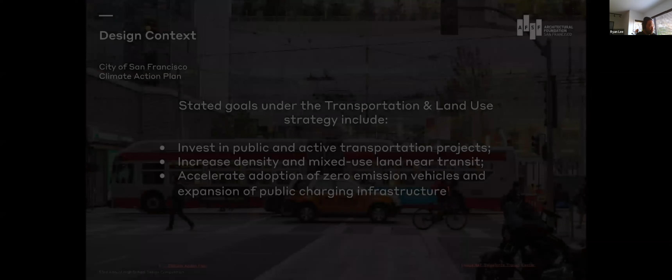So a little quick design context going into this year's competition brief. This was all framed around the overall basis of Mayor London Breed announcing her 2021 climate action plan, which highlighted six key sectors. The area of focus specifically for this year's competition was number three, transportation and land use, although a lot of those six opportunities kind of weave together.

This was situated around the idea of investing in public and active transportation projects, looking at density and really what a transit-oriented development is, in terms of increasing density and increasing access and usability for a particular neighborhood that could then expand for equitable access elsewhere via the transportation hub in this case.

Knowing that Salesforce Transit Center in downtown San Francisco exists as a major hub, part of that is getting down there through this downtown rail extension, which will extend the future lines of Caltrain, which currently terminate at 4th and King Street in the city, but also potentially open up the opportunity for the future of high-speed California rail service to terminate there.

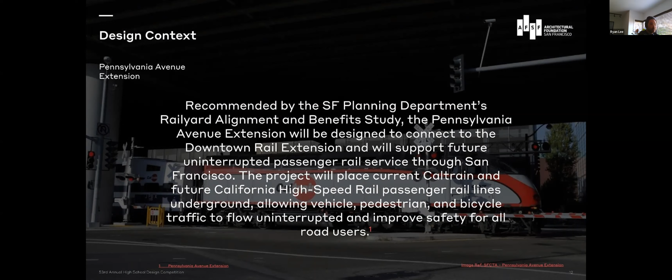So with all of that in mind, SF Planning has gone through a very rigorous process up until this point in planning what this downtown rail extension will be, how it will weave through the city, and looking at potential opportunities for railway stations along the way and increased transit hubs dotted along that route. A lot of that, as it relates to the Pennsylvania Avenue extension project, is really to talk about this intersection between Mission Bay, Potrero Hill, Soma, and Dogpatch, all within the area of the site that all of the students explored this year.

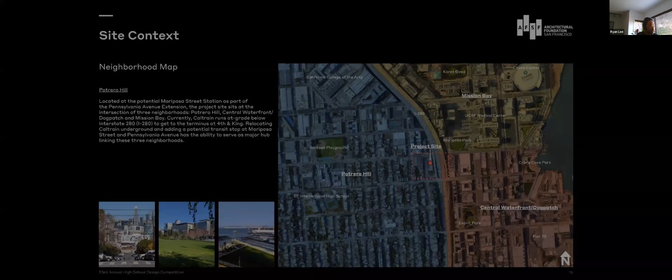So here's that route, running along the eastern edge of the city as it makes its way downtown towards Salesforce. Along that route is the potential proposed Mariposa Street Transit Hub station. You can see the project site here, situated between the nexus of Potrero Hill, the Central Waterfront Dogpatch, and Mission Bay. Zooming in a little closer to the site, this infill project just alongside 280 runs pretty linear with a sloping hill that runs high to low from Mariposa, then down south towards Pennsylvania Avenue.

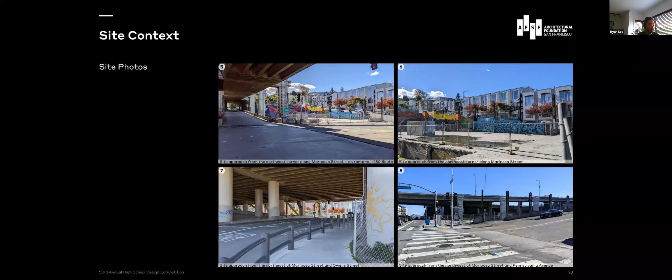A few site photos of what it looks like today. I know a lot of the students made their way out here, did a little site visit to soak in the site for themselves and really draw inspiration from being there in person, getting an idea of the neighborhood context and palette, especially for those of you designing this from afar.

All of the program elements the students worked on revolved around some major areas. The first being a transit-focused grand hall, including the main entrance and lobby, ticketing, and waiting halls. A commercial program brought in retail space along with a micro-mobility repair shop and a restaurant and cafe F&B opportunity. There was also the idea of embedding the transit hub with community-based social amenities, such as a senior center and an outpatient medical clinic, plus exterior space considering how a public plaza could be utilized on site.

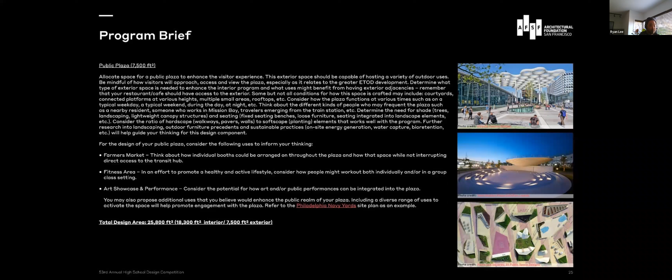It was a massive program brief for all of you to take in, digest, and interpret in your own ways. We commend all of you for being able to soak in all of this information and really put thought to paper, coming up with some really creative ideas for this.

All of you were very much considering your big ideas, looking at how to draw inspiration from either sustainability or diversity on site. All of these things we definitely saw come through in your work.

This year we had a total of 142 participants across 77 total entries, 29 of which fell into the individual category, 38 for group, and 10 for design process. Of those entries, we had submissions from 4 countries: China, Taiwan, South Korea, and the United States. We also had 5 total states participate: California, Florida, New York, Ohio, and Texas.

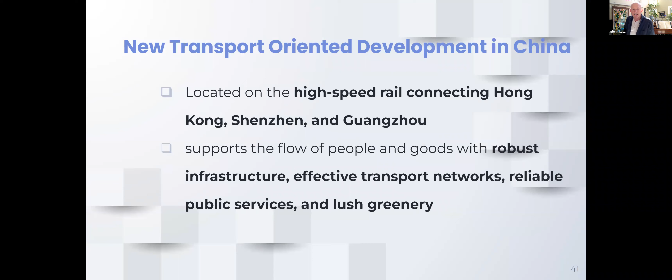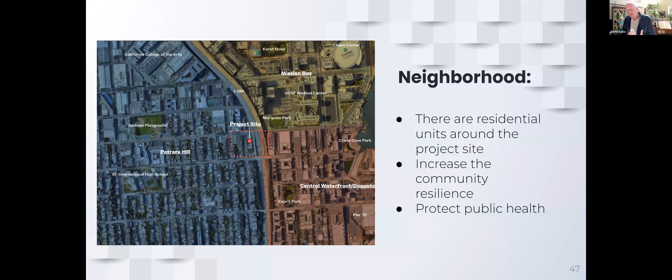Qingling really pulled on several very successful examples and looked at them in a detailed way. There was Denver Union Station, as well as one of the stations in China, where we looked at not only why the example was chosen as one we could learn from, but also pulled forward into a detailed analysis and lessons learned. So it's a respect for the history and the lessons that can be carried forward as we then try to apply it to this specific and unique context here in San Francisco.

It's just a really great example of a type of process that would benefit almost any project. That's really what we're rewarding here—that kind of looking back and learning what we can from the many things that have been tried in the past, and then taking the best lessons forward. Thanks, Glenn.

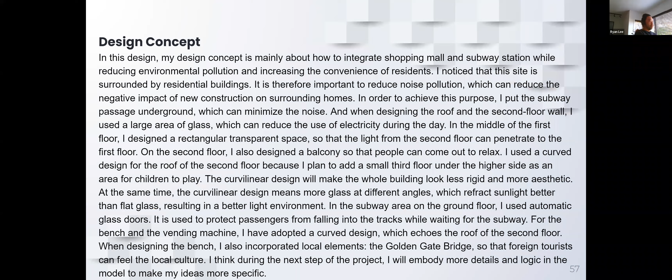There's a lot going on here in this deck, and I think a lot of this was also about describing some of the design through precedent imagery, helping articulate the intent of the space using precedent imagery in terms of what's been done as a reference. We do this all the time in a lot of our early inspiration work, and this is just part of that process that we don't see presented in this form as much as we'd like, because I know all of you are thinking of it from similar perspectives.

Congratulations there. We're going to go right into our third place entry for this. Third place for design process entry goes to Olivia Edwards for her project Under My Wing from Lowell High School. Congratulations to Olivia.

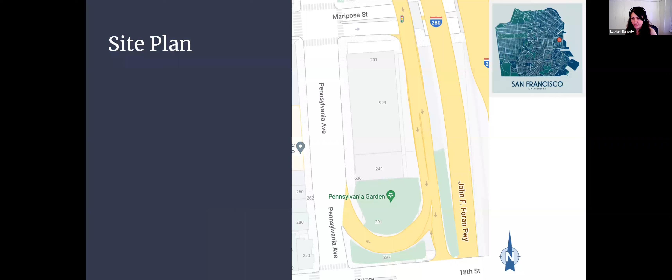What we really liked about your PDF slides is that you presented a lot of sketches of your design process. You gave qualitative descriptions of your reference of the moth, and also had a lot of site observations. You included all of your site notes. You discussed the freeway height and the relationship and priorities of circulation access points to the site, like what would be ideal locations for stairs.

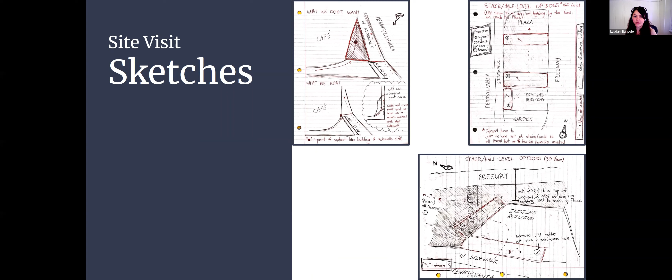We really appreciated that you thought a little outside the box about your modeling material, using clay because you felt that Revit could not express what you wanted as well. I think the design profession comes across this a lot, with new technologies brought from other industries to describe projects all the time. So congratulations to Olivia.

Olivia, are you here with us? Let's see her on the call. It's okay. Well, congratulations, Olivia, and thank you for your participation.

Second place for design process entry goes to Lesley Anne Chua for her project Metro Map Hub, Lowell High School. Lesley, are you here? You're not seeing her on the list. Well, but let's go ahead and talk about what we liked about the project.

Metro Map Hub was actually a lot of fun for us to follow through as jurors in terms of trying to understand the process, because it's incredibly well laid out. There's a very clear path from thinking at the highest level about the site and this inspiration, which is really these metro maps, these interconnected nodes and the colors that tie them all together.

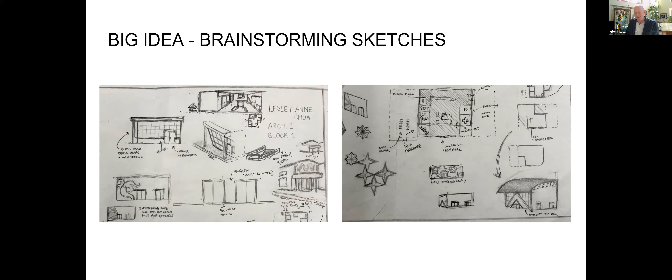And you can sort of see that process following through the initial brainstorming sketches, then she'll move forward into a little bit of an analysis matrix. And finally, we get to these preliminary diagrams, and really these diagrammatic sketches are ones that we really kind of enjoyed.

So it's ones where we're looking at these floor plan views, but seeing them overlaid with this almost looks like the metro lines, marking out the circulation paths and just the flow of activities kind of through the different spaces. So just be independent of the actual design itself, just understanding the thinking process, making that really clear.

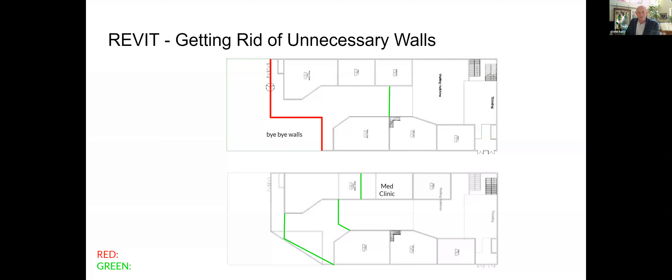So that we can appreciate it is something we always love as people who are consuming your designs, because the finished artifacts are great, but really knowing what's going through your minds makes it really special. It helps us to really appreciate where you ended up so much more.

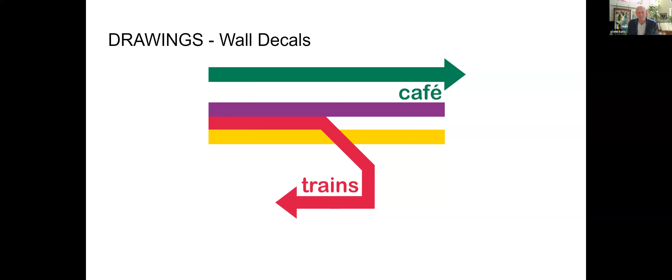So this consideration of really what could be modeled well and what, when we needed to, just could revert back to hand drawing, which is perfectly okay. Sometimes that's the best way to express your idea. And it's really just all about expressing it.

And then even as that final image of really how that whole thing that motivated us with these connections between the spaces, how that could turn into super graphics that could actually end up as decals on the walls of the station. Just really, it was a very complete package that really helped us understand the thinking and how that thinking actually ultimately worked its way into the finished product.

So yeah, it was just really great from that standpoint. Everyone can learn from just how to present that process and how helpful that is to the people that are trying to understand not only where you ended up, but how you got there.

Awesome. Thanks, Glenn.

Our next award, first place in this category, design process, goes to number 56, Brody Andrews, Leah Markle, and Travis G for their project Metamorphosis, also of Lowell High School. So yes, a huge congratulations to Brody, Leah, and Travis.

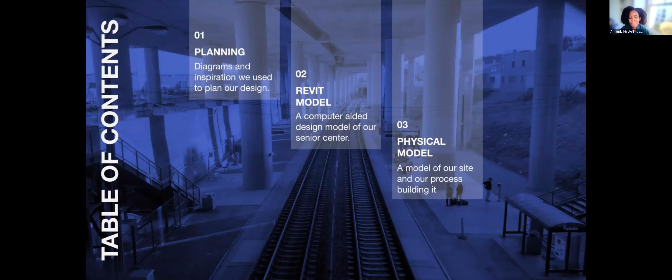I did see Travis's name in the participants, so maybe after I say a few words, I would love to hear, we would all love to hear from your team.

I think what we loved about this project is this concept, you see it in the first sentence, about life cycle. And this notion of life cycle and metamorphosis not only is related to the butterfly as they described it, but is also a concept in environmental design and related to architecture and how a building works.

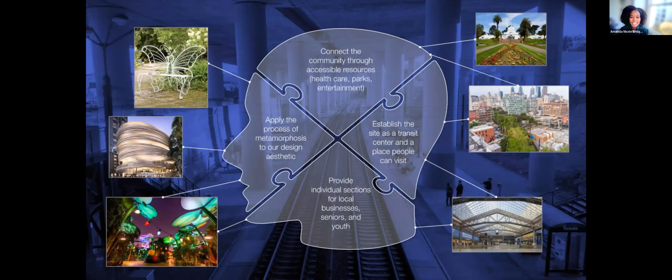As you can see, as Ryan is going through the slides, this is a very clear presentation. Not only is the design arc and the big idea very clear, but it's got great graphics. We thought that the hand sketches were really fantastic. And that just the conceptual study and analysis throughout this project created some really awesome results.

I mean, I think that kind of swooping forms we all really were drawn to. I think that images of the process, images of your model, which we'll see in a little bit, were really fantastic.

I think that some descriptions that you see in these renderings here, where, the rendering, maybe as it's developed, it will have more people or furniture or something, but even just one sentence about what the intentionality is behind it is really helpful for us, I think, as judges.

And here, these process images from the model, I just think are awesome. It gives us a kind of tangible, textured element, and really represents the overall scheme really well. So again, the big idea passing through the whole presentation is what we loved.

And we would love to hear from your team if anyone is on and able to unmute themselves.

Yeah, hi, this is Travis here. This is kind of crazy because this is my last competition I'll be participating in with AFSF, like my 5th competition I think. So this project was really able to show the transformation of how I've shown my process of working and stuff like that. I combined a lot of experience I've had from previous competitions all into this design. And it was really fun being able to work with everyone. We're all seniors, so yeah, we're just really glad that we were able to participate in these competitions.

Yeah, I agree. This is a really great way to end off the year and end off the architecture experience, especially with two people that I've kind of grown a lot closer with over time.

Wonderful. Well, thank you so much for chiming in. Congratulations again, and I hope everyone now gets to see your project and is enjoying it as much as we did. So thank you, and congratulations on finishing up your year.

Seniors, congratulations, you guys. Thank you. Really a lot of great clarity in the project and a lot of really great studies into exploration - we could really tell what you guys are interested in, and all of that really came through fantastically. So congratulations. One fantastic outcome is that it's successful because the judges all wanted to see where you were going to go next with it. And when you leave us wanting more, that is always a really good sign. So it really was a fantastic concept, and we'd love to see what you do next with it, because it seemed really interesting.

Now we're going to move on to the awards for our group entry category. I believe we have 3 honorable mentions to give away here. The first one goes to group number 14, Nander, Tanner, and Liam from Westlake High School, for their project Comfort, Efficiency, and Attractiveness.

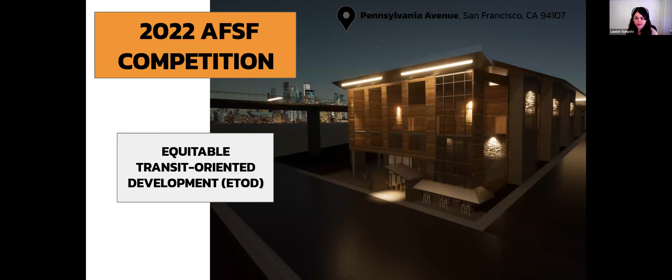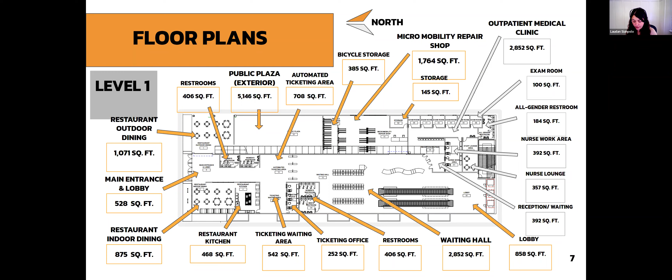Congratulations on your honorable mention for the group project. We really recognize that you took the prompt, you paid a lot of attention to detail, you laid out your spaces in very well thought through ways, and you have a clear understanding of scale. The building, both in plan and elevation, went hand in hand with the amount of space that you had, and you were thinking about circulation and flow. We appreciated all of your elevations in which you added shading, which gave depth so we could really understand what was in the foreground and what was receding from view. So we really applaud you on your thoroughness and clean presentation. It's really a great group of work. So congratulations.

Nander, I see your name. Are you and any of your other teammates here? And would you like to say a few words about the process and what you thought about it all?

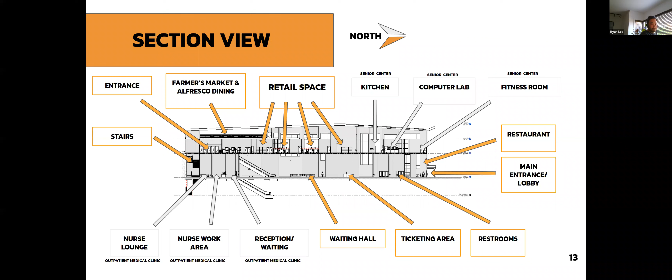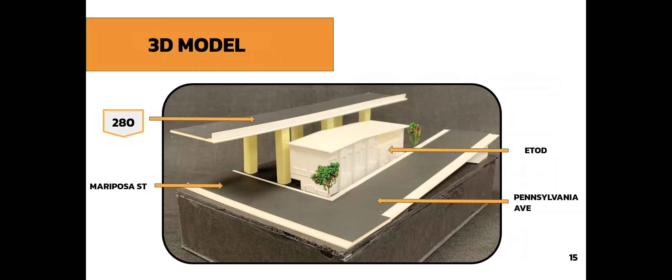Yeah, so in our main goal, there's so much stuff that we had to consider on this. I don't know where to start, but we basically wanted our project to look good but also function well. So we tried to make the roof slightly angled, so the long side would be full of solar panels that face the south. And we also wanted to consider the railways that go below, so we included a lot of escalators, systems, and all that stuff. So yeah.

And I'm very happy to be part of this competition.

Thanks, well, great job to your whole team. Thank you. Congratulations.

Next up, honorable mention in the group category goes to the Tri-Center by Alvina, Joanna, and Ryan of Burlingame High School. Are any of the three of you here with us today?

Hi, yeah, I'm here. Hi, Joanna. How's it going? Congratulations. Thank you.

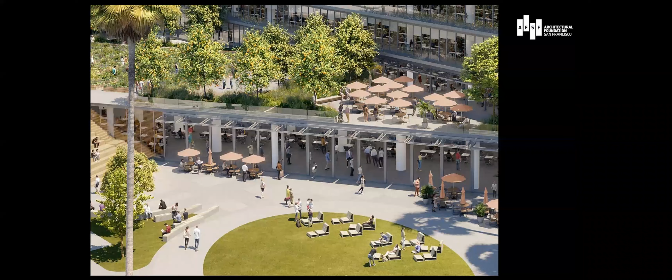Anything you'd like to talk about in terms of this project and what your big idea was and what you guys were aiming for here? Yeah, so we wanted to create a more, if you look more into the slides, these are more inspiration slides. We wanted to do three different separate parts of the site and connect it together through small spaces and big spaces. So in our later slides, we tried to have this theme go throughout the whole building, and our facades also. We tried to have these curved features throughout the whole entire site to make it more connected.

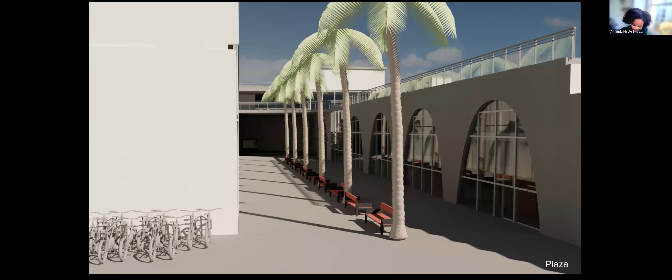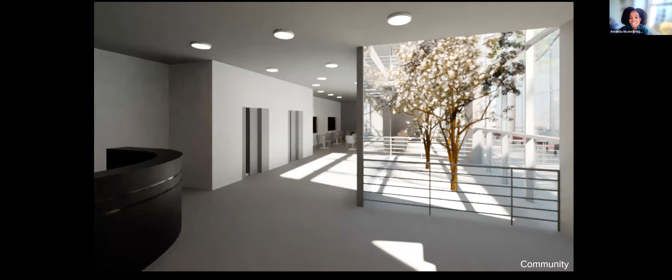That's great. I think what we were really drawn to in the project is exactly what you're talking about, this notion of breaking this really large mass into smaller pieces and creating these activated, awesome public opportunities for cohesion through, around, under, and above these smaller volumes. I think that's just a really great and sophisticated step to take for this project, and all the judges were really inspired by that aspect. I think there's a landscape story, there are trees, really beautiful renderings here. We can see those, and I think that intricacy, you're really focusing on the journey of people and individuals as well as the community through the buildings and spaces.

So we really were taken and struck by those aspects, and the outdoor amphitheater especially, we talked about several times. We thought that was a wonderful way to face out towards the community while also drawing people into the project and into the building as well. So that's what we're really excited about, and congratulations again on the honorable mention. Thank you. You're welcome.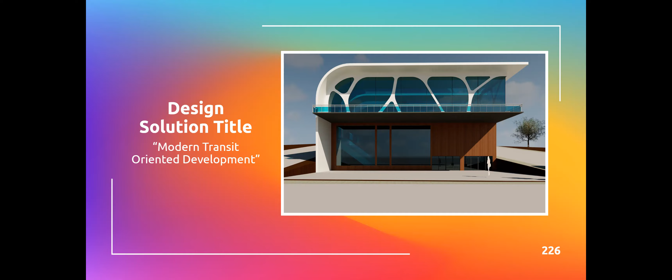Yeah, we just had a great time doing this project. It's our last project together, and we just wanted to go all out. We got some reference from the Leonardo cube, and we used that as the top of our glass for the second floor. And then we wanted to go for a more modern effect with wood paneling on the sides.

Awesome. Also, this is Isis, I wanted to add to it. One of the things that was very impressive to us, and the entire team agreed upon, is that the modernist feel and the sustainability aspect of your project, starting with the solar panels and the types of window panels that you incorporated into your design, and the roof garden as well, and the connection with the corner of Mariposa and Pennsylvania Street.

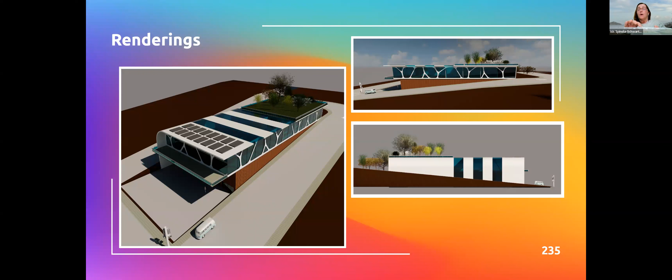And one other item that I wanted to mention is, what was the inspiration for the curtain wall, the glass on the second floor? Because it has a very modernist, organic feel to it. And I think, Ryan, if you keep going, we'll have an elevation of that as well. What it looked to us as something that is very 60s, very modernist, early modernist, but it also has a very 21st century approach to it. And all of that, it was very intriguing to us, so what was the inspiration there?

We used the inspiration of the Leonardo cube. We had seen some references, and all three of us were drawn to it, and we thought it'd be such a great way to bring in natural light, with it being San Francisco and it being a sunny area.

Great, it really comes through. And if you were to look at some modernist designers like Niemeyer, he's a very well-known Brazilian architect, he did some United Nations projects. You'll see that some of the items like the Leonardo cube are also expressed in his designs. So it will be great for you to take a look and see how these types of ideas have great applications in the modern world. Congratulations, great project. Thank you so much.

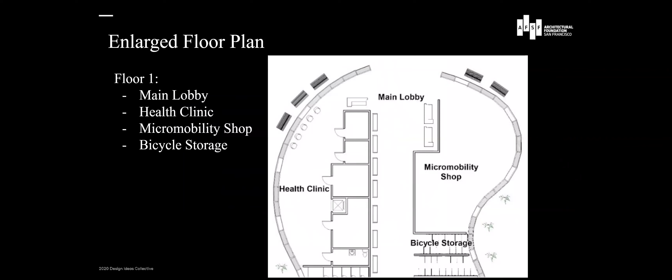We tried to prioritize the location of areas as much as possible and place them in very accessible places. We also wanted to allow for as much natural light as possible, which explains all of the glass walls and windows. But yeah, thank you so much.

It's definitely a very evocative form that's embedded here into the site, and everyone's taken a different approach to this very unique site, with the elevation change, the long linear cutout, the adjacency to the freeway. I think being able to break the mold of just a pure extrusion, and to really create these pockets of space through the notion of a hilly topography, and even embedding that notion of a hilly topography into your canted facades, are all definite aspects of this building that all of the judges were intrigued by.

Does anybody else have comments on this one?

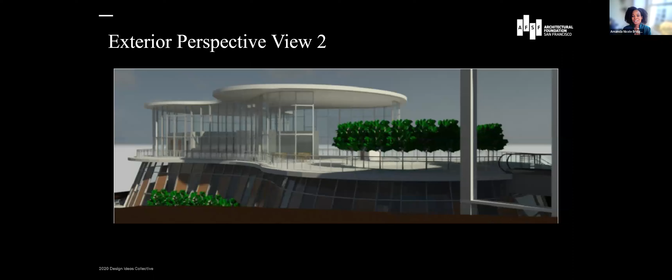We love the form of the building very much. One thing we all spent some time talking about was we'd love to see where this form and these kinds of shapes start integrating into the actual site—what would happen if we took these curvaceous, amoeba-like forms and got some of the landscape around there integrated into that, if that organic shape could start growing out of the site or connecting to it.

Again, it's one of those things where you leave us wanting to talk to you about the next steps and where you'd go even further with the process—that's always a good thing. That means you really had us engaged, because we really care about the project and what could happen with it.

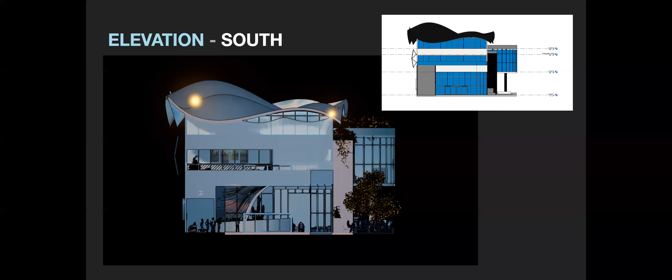Yeah, so we were thinking of the birds in Lake Merced and how they travel on the water, and how we see them moving around. We were thinking about how the waters actually travel instead, and we decided to incorporate the wave design onto the roof and the stairs, if you can see the rendering. Yeah, that's basically how we decided on this design.

Very good, and some nice rendering. Toby, is Toby there too?

It says his mic's not working. Okay, I see that in the chat. Okay, well, thank you guys for going ahead and sharing.

Let me go ahead and comment on why we love this project so much. Really, you guys created a very sophisticated form. It really is a very interesting, very intriguing building. You know, it would be a landmark. You want to see this, but it does it in a very sophisticated way, in that you're not taking up the whole site. It's actually sort of modest what you're doing. You're kind of receding back into the hill a little bit.

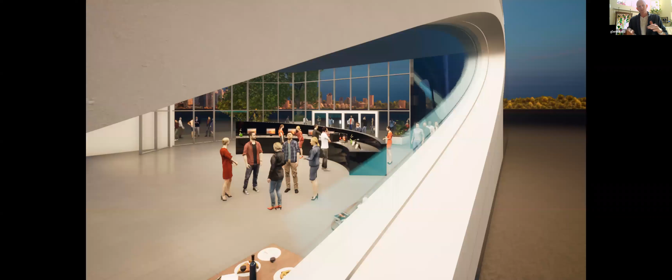You're leaving a big public plaza. We have that nice sheltered space, which you envision as an art space or a public plaza for performances. The overall relationship to the site and how it's really inviting that community. And this isn't just a train station, it really starts to speak to that whole notion of being a hub that can bring everyone together.

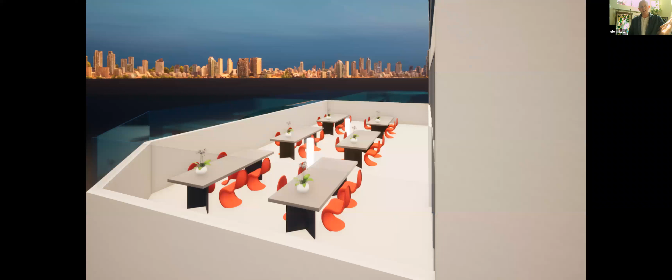Yeah, that really spoke to us. The articulation of the roof is really interesting. The windows on the 280 side are quite interesting. It's just really quite a nice, again modest, but quite fascinating composition.

But then what really sells this and what really elevates you over the top is these renderings you've created are just very fantastic. So our hats off to you on that front, in that not only are you using the tools well, but the way you use your people and tell stories, you really start to understand the user experience of what's going to happen here. And that totally sells the concept.

You can picture this in the neighborhood and how it would bring people together. And just that total package of how you are sharing that story and we can buy into that story really propels it right up towards the top. So congratulations, you guys are doing incredibly well with using these tools to share your ideas with us. So thank you, congratulations.

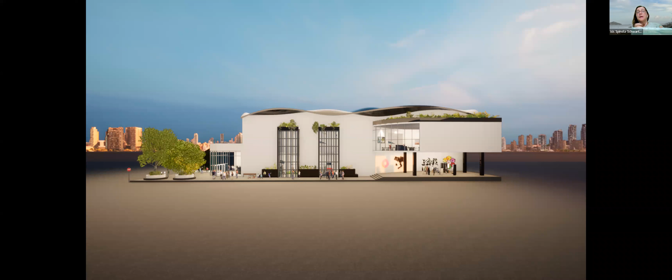Congratulations. I'd like to mention that this design, just like the previous one, really integrates the building with the surrounding site. It's nice to see the flow from the corner of Pennsylvania and Mariposa Street, that people can arrive on site at one level and then move throughout the building, but it opens itself up to the street. And like what Glenn said, it's very subtle, but it's also very inviting, in that the incorporation of landscape and big open plazas into your space to make this building welcoming, a true community center, is really fantastic.

And we were very, very pleased to see this project in its entirety. Thank you.

Awesome, and you guys are both 10th graders, right? So that's pretty impressive to be able to pull off a detailed model and renderings of that caliber for what I'm probably guessing is maybe your first design project. Correct me if I'm wrong, but really impressive work and visualization from you guys. So thank you.

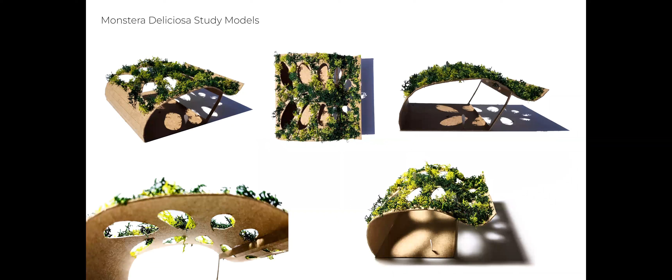Good, well Isaac, go ahead and why don't you talk us through a little bit about your project here. Yeah, well, I guess I would start with saying that Amelia and I came together as we have very similar interests, like both the architecture side, sustainability, but we also both enjoy spending time in nature and the outdoors. And that really influenced a lot of where we wanted to take the equitable aspect of this development, in order to bring equity to everybody in San Francisco, which is really urban. For us, I think that we also wanted to make sure that everyone could experience these outdoor things that we really both love to have access to in the city. So yeah.

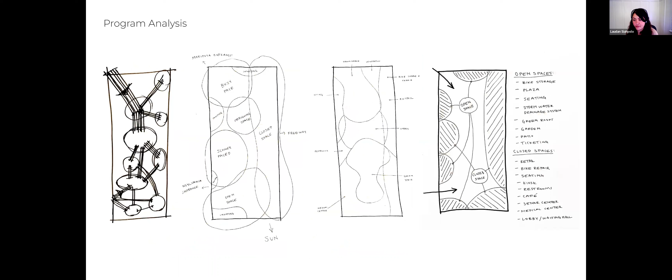Yeah, definitely. Well, congratulations to you both. We were all very impressed, the jurors here, by your presentation of process. You're very much thinking about all aspects that are critical and important to design. Your site topography is integral to your design. You have different moments, you have breathing space for these really busy transit hubs where a lot of people are moving through. Your concept carried out throughout your design.

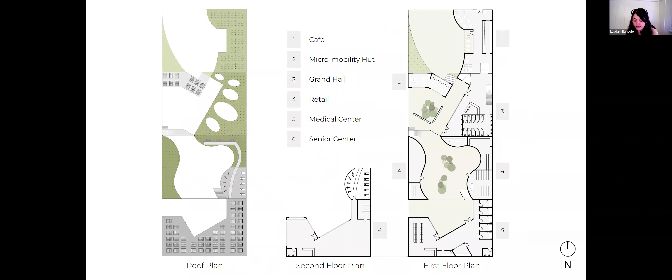It was thought of at every level. And we also really appreciated your floor plans, the use of color, just enough text and explanation. And your hand sketches had a lot of character, and even the fact that you had the floor plan with the section on the same page, it lets us understand those relationships. And we felt that this was a really site appropriate design and overall concept. So very good job to both of you.

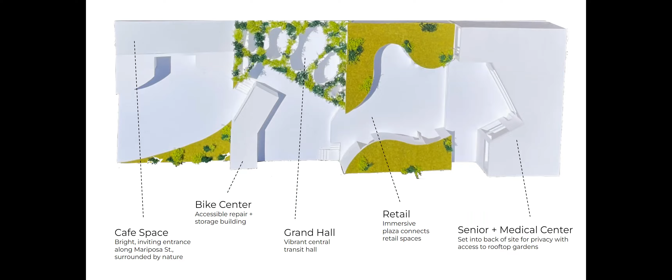I also want to thank Tara, our teacher, who spent so much time instructing us and helping us. There were so many times when we were fixed on something we thought was the right way to respond to the site or the program, but she made us go back and do more sketches, then redo a model, then do another study model, and then another watercolor, and then we ended up here.

Getting stuck happens a lot sometimes. So it's important to have other perspectives, which is why in architecture we always work in studio groups, because we feed off of each other.

Yeah, to both of you, it's a very comprehensive presentation. The clarity in the narrative that you told in your slides, from conception to execution to where you got to here, is very clear all the way throughout. You can really tell that even though you may have had to go back and re-sketch ideas and pull a little from this and another piece from a different aspect of your drawing at a different point in time, it was still heading in one singular direction that you set out very clearly from the beginning. So there's a lot to be commended about, just clarity in presentation and storytelling around this one too.

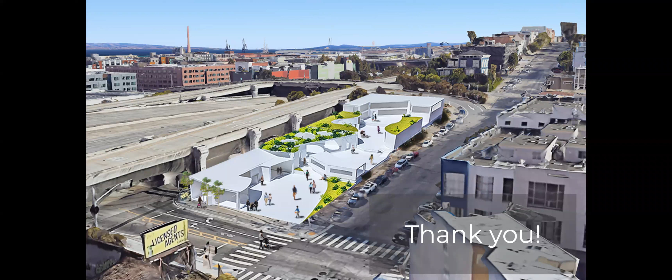Thank you so much, I really appreciate this. Congratulations, you guys. And so with that, we can move on to our category for individual entry.

Our first honorable mention in this category goes to Lee Tae-won for the Ock Center, Lee of the North London Collegiate School, Jeju. I don't think Lee is here with us, but I think we can talk a little bit about his work. We're recording this, and we'll definitely be able to send this out to everybody who participated. So Amanda, if you want to jump into this one?

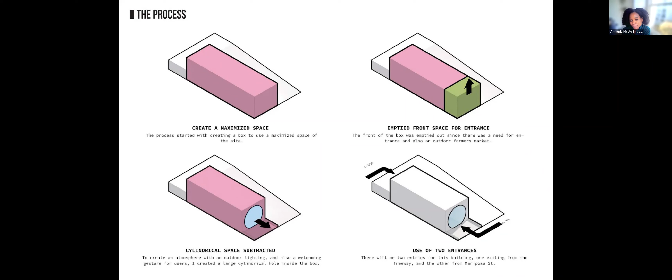Absolutely. Well, Lee may be watching this later. Wow, I think we were all wowed by your presentation, by the clarity of the diagrams, just a really, really strong aesthetic that carried through the whole project. I think the concept diagrams and the renderings are fantastic, these notions of how people walk through and into the spaces, these different hierarchies of scale. We can see here the medical clinic is a different size than the cafe or restaurant, and that's reflected in the section.

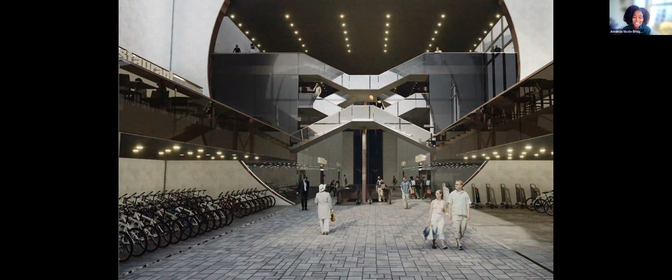I think that's just a kind of level of sophistication we're really impressed by. Again, the diagrams are really great. I think overall the project, the building, has an incredible structural aesthetic. It almost has an urban renewal feel. We loved that we were seeing things like bikes, transportation, and pedestrian aspects reflected in these images. Again, similar to some of the other projects, the use of people, furniture, entourage in the renderings didn't feel accidental, it was extremely intentional.

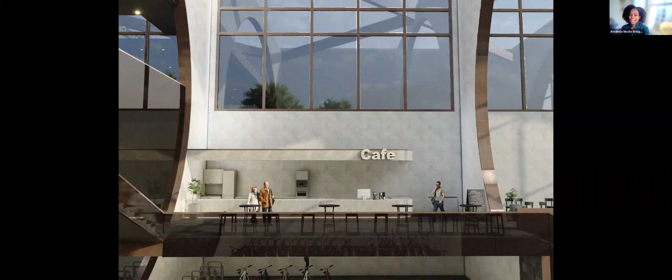So with that, I would say if any of the other judges had any comments, but congratulations and thanks for sharing your work. I would just add that some of the spaces, the seamless transitions between them and the transit circulation area, was very believable and something we feel like you would actually see in a real transit center. So very good observation on your part.

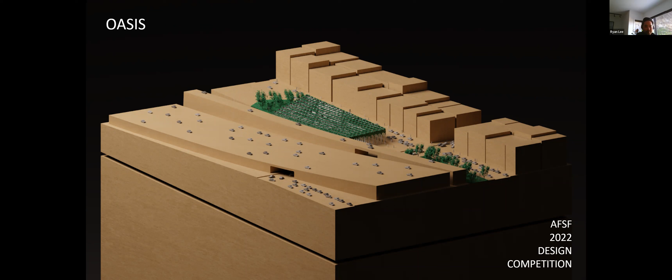Yeah, for sure. So the challenge for me with this project was the site. I think it was very difficult to work with. The highway and the road, the access was hard to figure out. But somewhere along the way, I realized I should just work with the site, not fight it. So the main idea was pulling in the garden and working with that, which is how I got the green design concept.

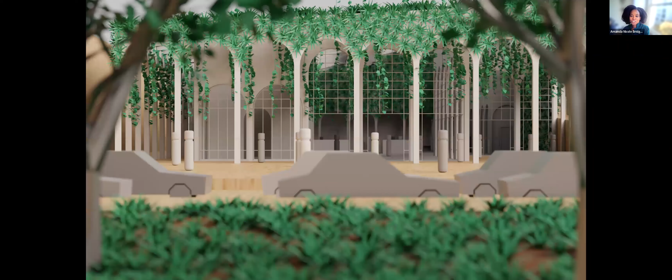I think as you were describing it, we understood that feel as well. You did work really well with the topography—we can understand the ground below while looking at your building from above, which we really admired. You can see the language of the arch used in different ways at different scales—sometimes open, sometimes glazed or enclosed. It was just really beautifully done. We were all struck by your physical model; it's really impressive. And I love that you used the model for the photos. Anyone looking at this right now, it's a great image—the greenery telling its own story from above, and even dangling down into these spaces is a very interesting and unique idea. That intersection of ecological and landscape elements with the architecture itself is something a lot of projects attempt, but we thought you did it really successfully here.

Congratulations. Yeah, thank you—it's not a physical model, but my goal was to make it look like one. But there was a physical model somewhere? Still, well, it's a great aesthetic, we like it. We also like that you had context showing with your model.

Absolutely, and it's very subtle too. It looks like you said you struggled with the site at first, and your approach to actually let the site dictate what you should do with it, by creating this oasis between the apartment blocks and the freeway, you actually accomplished that in your design. Congratulations for taking a concept and an idea and working in a beautiful way to show how this center can become an oasis in this urban core.

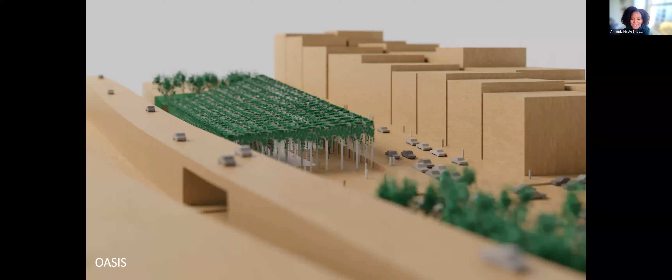So for everyone who loves rendering and thinks we always have to go photorealistic—take a message here: the model-like quality allowed us to enjoy the form without worrying about whether all the colors are accurate, and I think I appreciated the form more because of that. I completely agree. It's a reminder that the tools aren't necessarily ends in themselves—digital modeling, hand drafting, or physical modeling doesn't have to end there. You can always use a blend of methodologies, mix it up, make it messy, confuse us. I think that's great, so more power to you.

All right, anyway, to move on—go ahead, Ryan. Yeah, the ability of the concept of extending the garden and really making that read at the forefront, having the context recede, having your building recede, even with the monochromatic coloring, the intention behind that is really great to see.

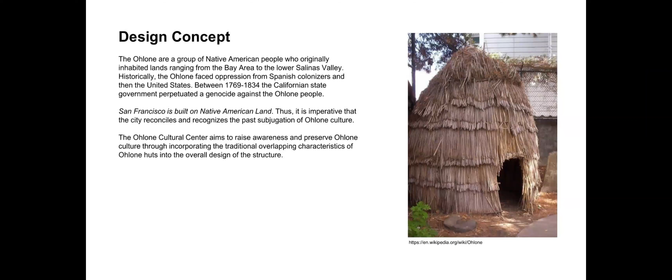Ray, I think I saw you on here. Hello, yeah, hello. I just want to thank the Architectural Foundation San Francisco and the jury for this award, and my parents too for their support.

And then in terms of the design, I wanted to recognize the site's relationship to the environment. So in this case, I wanted to reference the Ohlone Native American culture in terms of the exterior design with the overlapping characteristic of their traditional huts.

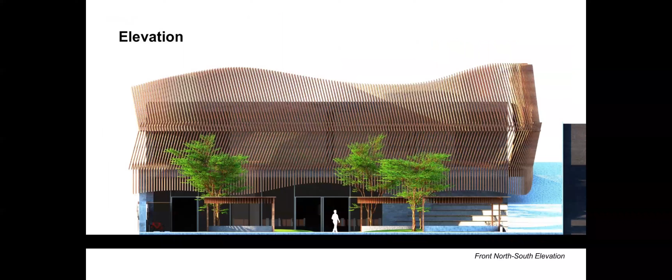And then for the movement, I wanted to have a plaza facing Mariposa Street because through site analysis, I found that Mariposa Street had the highest traffic density compared to the avenue, which is why I wanted to mediate that movement. And then at the intersection between these two entrances, I have an atrium to mediate movement as well. Yeah, thank you for the work.

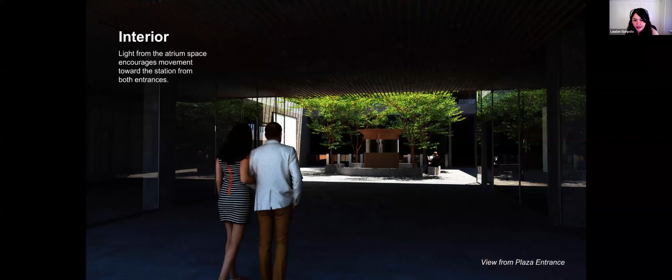That was very thoughtful about the site and its context. We really appreciated your site plan, where you mentioned things that were relative to one another, like the schools and the hospital nearby.

And all of your floor plans, although they were hand drawn, were really easy to understand, and they were clear. And that's really what's most important at the end of the day.

And your technical skill, just the quality of your renderings and the warmth you gave the site with the use of that Ohlone reference, was something we all really liked about your project. And you're correct that approaching the site from Mariposa is another very strong observation about the site and context, and where everyone will actually be entering into this busy hub. So congratulations on all the work that you did, we're very, very impressed.

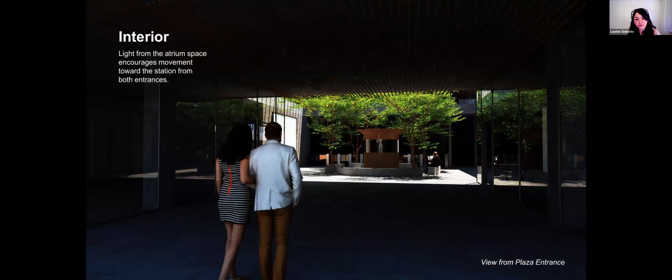Thanks, Raina. I think a lot of the vignettes here that you framed really capture the essence of what you were going for in a lot of these views. And to tie it again back to the Ohlone reference, you can even see it at the scale of the building, but even here, at the scale of the kiosk. You're starting to apply that concept throughout in smaller moments, not just one overall move. That continuity throughout your project is just one thing that enhances its strength.

So congratulations again. One thing I'm really enjoying about this view in particular is you can imagine that original Ohlone hut and what the light experience would be like coming through those sticks as they were bundled. You see it in the facade, you see it over the skylights. Although it's a very modern building compared to the original reference, you're creating that same kind of ethereal quality to it. I really love this rendering, although it's a little dark and moody.

Yeah, that's what I think its strength is. This feels like a place I'd like to be in, out of the hot sun. As I'm going through my busy day, this is a little moment of respite before I hop on the train and go wherever I need to be. It's just a really inviting space. A lot of these transit centers, especially in California, have this indoor-outdoor transitional space, and I think you captured that perfectly in the atrium.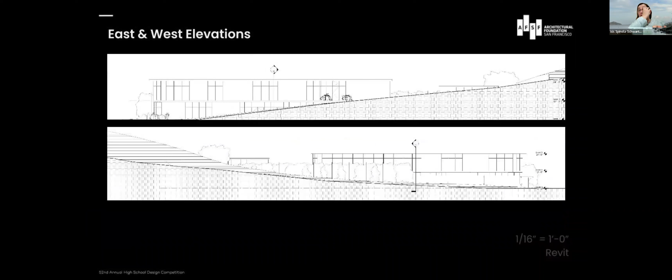Congratulations. This was an entry that really spoke to all the judges, and you will hear from everyone. But to me the most impressive thing is how you took this organic shape, the pebbles, and carried that idea throughout the project, from the concept development to the shape of the spaces within the building, and even on the pavement, where you've used the pebbles within the ground space of the building.

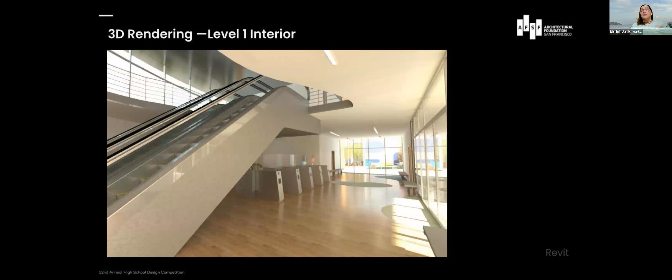That organic feeling is really felt throughout in the separation of the spaces. It creates this tapestry that is San Francisco, with all of the different ethnicities, and the building itself with all of the different spaces that are interconnected, yet also separate in their own right, with their own different expressions. So congratulations for carrying this through from the design sketches to your big idea, all the way to the execution and the great renderings you've done for this entry. All the best to you.

Thank you. All the other judges will have other things to say. I would just add that it's great that you thought outside of the box.

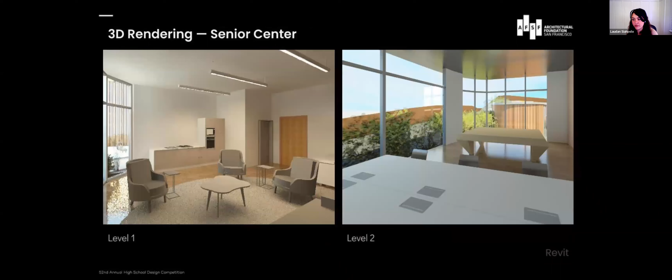Sometimes it could be easy to get caught up on the property edges, thinking that's where the building needs to go all the way up to. But you really let this project breathe, with these great spaces between where the building begins and where the edge of the site starts. You have a good understanding of scale and what's site appropriate, and the whole area on the back that's right next to that existing park really makes that connection and relationship.

It seems like from your rendering here that your intent is to keep that existing mural at the south wall, which I think as a neighborhood would really be appreciated. So it's a great observation of the site and its existing features, and we really enjoyed looking at your project.

I completely agree with everything that's already been said. The only thing I would add is that sometimes with a big idea or thesis or concept, you can think of it as 'show us, don't tell us.' To me, your plan, your drawings, everything from the concept sketches through this final result, helps us understand your intention of those organic forms, the notion of the pebbles, really connecting to everything through the site. That continuity and that story really drew me in.

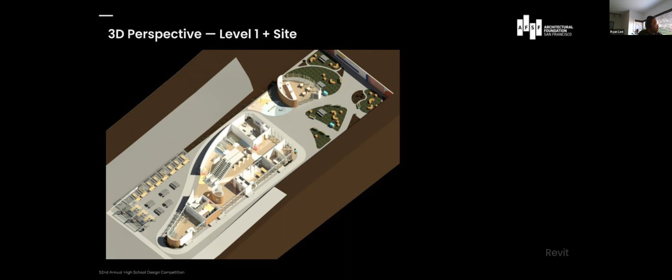Right, moving on to our last and final award for the day. First place in the individual category goes to Josh Park of the Korean International School for Mariposa Center Eco Village. Josh, are you here? If not, you will hear this on demand when you sign in a little later.

See, JP is JP. I was hoping JP might be Josh Park. Josh, is that you? I think JP may have been the name of one of the other group entries that won. No problem, might have a time zone difference here. Not sure. Right, okay, so Ryan, why don't you go ahead and we'll start running through the slides and talk about what's going on here.

So here we see Josh's building, and you can see the references. We're getting a little bit of the concept behind it all, drawing on these organic forms like the Nautilus shell, and how that's going to start affecting our circulation and the overall organization of the spaces.

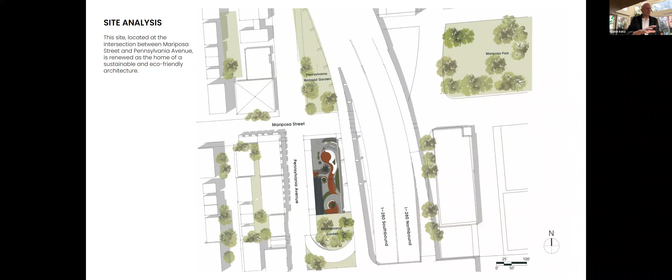But what really started drawing us into this is the whole notion of how Josh is organizing the program around the site and what he's creating of the site. There's a really interesting relationship between the different buildings and the space that is created between them. So the project is called the Eco Village, and you can see here a little bit of the analysis.

Diagrammatic views, in terms of how the layering is going to work.

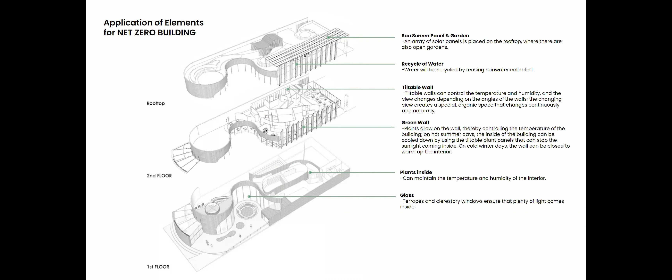I think it's another participant. Okay, yeah, okay, very good.

So now we have these, again, these kind of 3D layered views to help explain and show us the building. But then what really starts getting very strong is when we start seeing how these forms are related to the site.

So what's happening here is the building itself is actually fairly modest, but it creates these really welcoming plazas all around.

Ziba, can you mute your phone, or Alan, are you able to mute some of the participants? It's Ziba. There we go. Thank you.

Okay, so here we have this site image. You start seeing the spaces themselves, but what's kind of remarkable is really how much of the space is not covered with buildings. It's actually covered with these really inviting plazas that start welcoming people to the site.

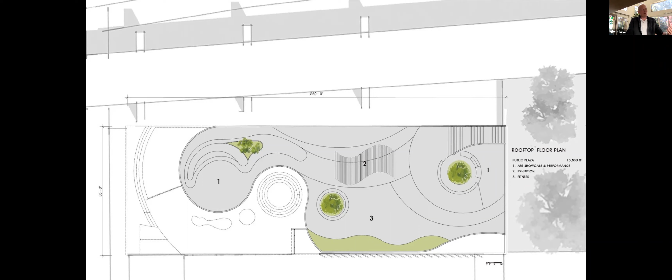So maybe Ryan, move ahead to one of the 3D views that show it in an oblique way. Okay, we have those renderings. These renderings are all quite nice in terms of the shading.

But again, when we start thinking about these spaces and these forms and how they all come together, what's really interesting is Josh has put together a series of small experiences. So as opposed to a big center that feels like a huge grand statement that starts to dominate the site, this really is a bunch of small, very human scale experiences that he's actually even branded.

There's the Momo Cafe, there's the Mariposa - I forget which - each of them has their own sort of little branding. And when we start getting into the renderings, you start seeing people using each of those different experiences. So we're starting to understand the space as a series of different human experiences, events, and how you're actually going to be using it.

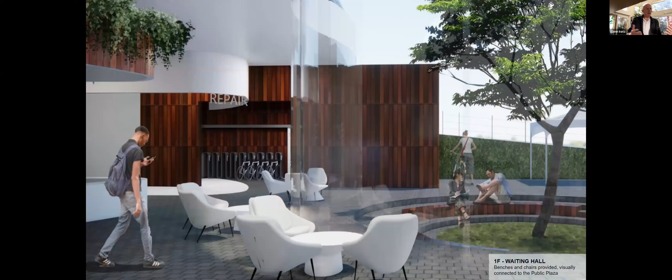And in the end, that collection of all these things really starts to feel like a neighborhood center that pulls people in from the community and invites you to be there. So you don't have to be in awe of the space, but you're invited to come in and use the space, and it becomes a part of your life.

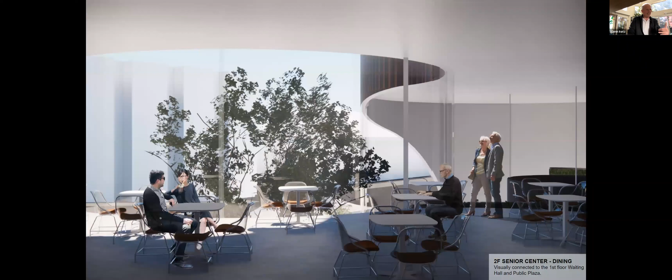And really that whole idea of sophisticated modesty is very appealing. I think he was very successful in creating a village of different experiences, none of which are overpowering, but all of which are very inviting. And the collective of all that really adds up to kind of a very powerful addition to the neighborhood.

So this feels not only like a transit center that'd be great for that function, but this feels like it'd be a great addition to the whole neighborhood and really pull people from the neighborhoods together.

Anybody like to add anything to Glenn's comments?

I would like to add that a few of our top entries show this connection between nature and the built environment. The most successful ones have incorporated organic forms and planting, conceptually thinking hard about how to incorporate landscape or nature into a very urban project, creating a respite in the process. It's a very busy center with a freeway in the background, yet approaching this site, there's so much that speaks to the organic nature of the landscape, and landscape is incorporated into it. In the materials with the wood, there's a wood facade building, with diversity in the building facades, so it doesn't feel monolithic. All of this allows something as big and massive as a transit center to look and feel like it has more of a human scale.

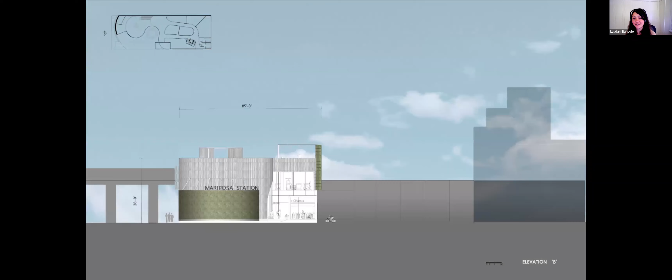I'll add also, I think we all liked the diversity of people of all ages, races, and genders in your renderings as well. It's very appropriate for the neighborhood and context. Also your use of vertical fins on the west side is something I wouldn't necessarily expect for you at your age to know, but that's something we do all the time on west facades. It's an appropriate type of solar shading, along with the incorporation of solar panels on the roof. You definitely paid attention to the prompt and the design problem that was presented to you.

Sometimes getting a project brief or prompt, like a transit center or hub, what's incredible about this project is it goes above and beyond that. When we look at some of those renderings and spaces, it feels like a place people would want to come to hang out, go to a cafe, or walk with their child. It's not only about transit or retail, it goes above and beyond that. It really becomes an enticing, lovely space, articulated through architecture in different ways, where there are things outside, things inside, and things in between. Just a really impressive level of development from drawings to renderings through the design execution. So congratulations again.

Thank you, Josh, for capturing what I think is the spirit of the brief in terms of this idea of inclusivity throughout, and creating these nice moments throughout your building that are very scalable to the community and speak to exactly everything that all the judges have spoken to today.